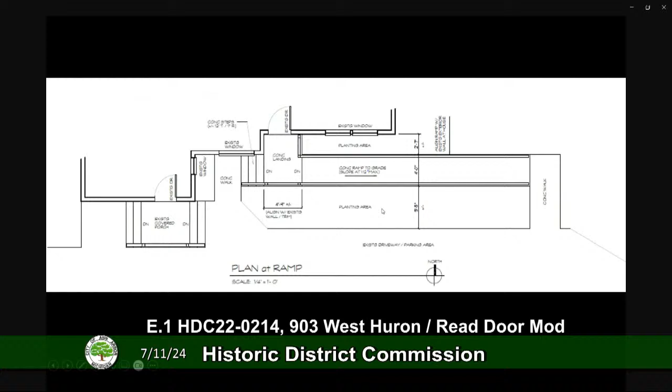In terms of the Secretary of Interior standards: number 1, a property will be used as it was historically, or will be given a new use that requires minimal change to its distinctive materials, features, spaces, and spatial relationships. 2, the historic character of a property will be retained and preserved. The removal of distinctive materials or alterations of features, spaces, and spatial relationships that characterize a property will be avoided.

5, distinctive materials, features, finishes, and construction techniques or examples of craftsmanship that characterize a property will be preserved. 9, new additions, exterior alterations, or related new construction shall not destroy historic materials that characterize the property.

For entrances and porches, it is recommended to design and install additional entrances or porches on secondary elevations when required for a new use, in a manner that preserves the historic character of a building. It is not recommended to introduce a new entrance or porch that is incompatible in size, scale, material, and color, or to install secondary service entrances and porches that are incompatible in size and scale with the historic building.

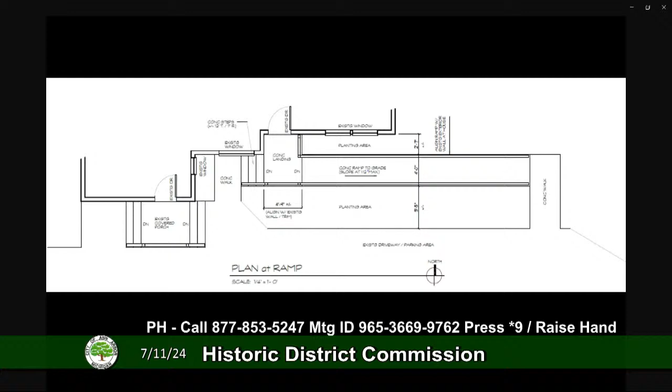So what was PVC then? The actual deck boards that are currently Doug fir — oh, I thought it was a concrete deck. Oh, the deck boards of the ramp. The deck to the left, in the report, there's not the one with the ramp — that one.

There is a concrete block on the parking lot side that there's a wood structure resting on. That gray is a concrete block that's painted, matching the other concrete, but it's the only one painted. It's made up of a wood structure, maybe a 2x8 frame, but on top is a tongue and groove Doug fir that's completely dilapidated. The framing's fine, but the proposal for PVC would replace that tongue and groove Doug fir. And again, we would do Doug fir if the board would prefer.

We're here to respond to you — you propose what you want to do, and we respond to it. I appreciate that very much, but I'm also very open. You guys have some creative minds, and the time to figure all that out is working with the city, which you clearly did, and we appreciate it. But at the meeting here, it's difficult to try to design things, because then we have a moving target we're trying to approve. We're fine making little changes, but we're not the design board to say what material should be used here.

Okay, but I think we've got, as far as I can tell, all the materials that I was questioning. Okay, let's take a break. We'll go to the staff report, and then we'll move on from there. Thank you, Bart.

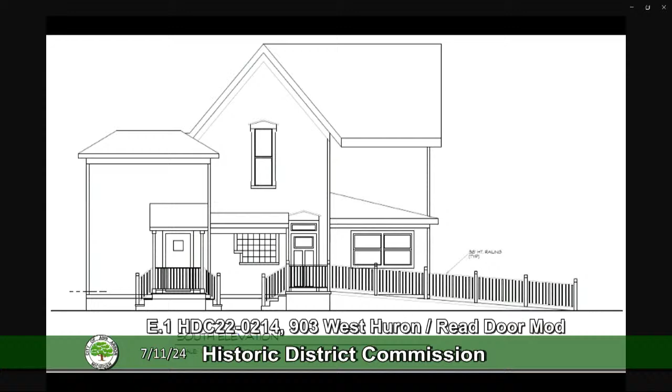The siding, to that point, was just to make everything look uniform. So we have the left addition, I'm going to call it, that is a stairwell - I don't believe that was originally, I think that was a kitchen, but anyways we'll call that stairwell the left door on the back of the building. That has an old brick foundation to it that is exposed, and underneath that very modern stoop is a cement block.

It's not out of trying to cover things up, it was just trying to make the building look more uniform - a bit of a counterintuitive thing. The standards are to show the different periods that the building was added onto, and I think it's fine, I don't mean to throw that into trouble. Because aesthetically, we really want to make this building nice - that's the goal. We have some significant goals, and we've procured a lot of excellent experts to work on this thing.

Dry blasting veneered brick is not something we normally do. We did that in the Riders Hobby Shop building when we brought that together, and we've done it on a few other buildings on Main Street, but that is only just - I'll leave it black if that's what you guys want, I'll do whatever you want. But then there are other things you can spend your money on that'll have more impact.

For the new ramp, I wanted it brick only because then it would blend with all of that veneer nicely, but we can use anything you want, brick works for me. Brick is fine. Yeah, brick is fine.

When you build that ramp, is it wood framed, or are you planning on building it out of block and brick, having it solid and then skinning it with a veneer? It would be solid - a solid cement structure would be my hope for it, it'd just be a better long-term piece. Okay, veneer makes more sense, I see what you're saying now - in my head I saw it as a wood frame, that's gonna be a weird thing, I get it now.

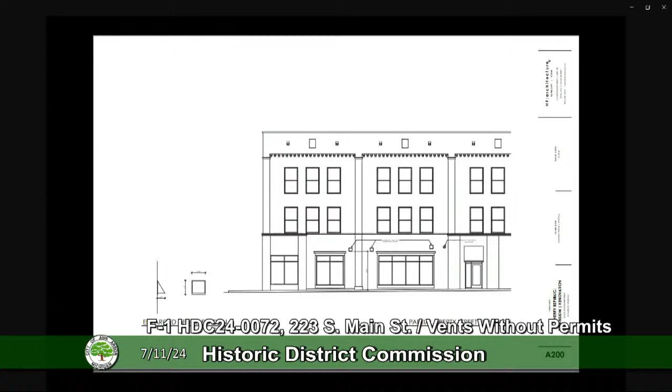Here are the drawings that you can see. They are circular penetrations in the masonry, and the applicant is proposing to cover them with these square vents. Here are some applicant photos, and here is what the vent would look like.

I did read these Secretary of Interior standards, so I'm just going to flip through these ones already. But I will say that the work does not follow the Secretary of the Interior's recommendation of identifying and preserving masonry features that are important in defining the overall historic character of the building, such as walls. It also does not follow the Ann Arbor Historic District guidelines, which state that attaching mechanical equipment so that historic fabric is not damaged or destroyed is appropriate, and installing mechanical equipment and wiring in locations on the roof, rear elevations, or in alleys so they are not visible from the street is also appropriate.

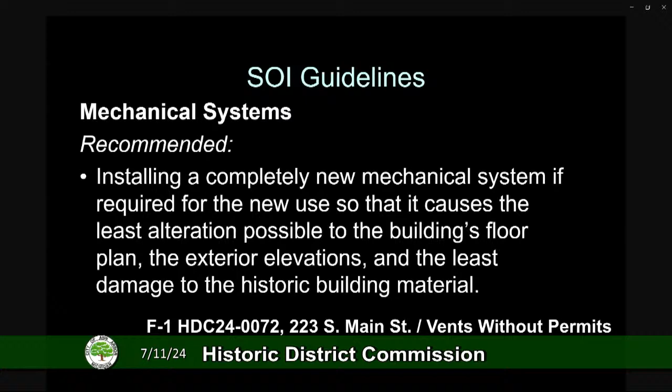There are some more SOI guidelines about changing masonry and mechanical systems and health and safety, similar to ones in the Ann Arbor Historic District Design Guidelines. The Historic District Commission must decide if these 3 new penetrations on the south elevation facing Liberty Street are significant intrusions requiring remediation, or if they are approvable. Thanks.

Thank you for the staff report. Now we'll go on to the review committee report. Please let us know when you're there looking at it. You know, what is it? What does it look like?

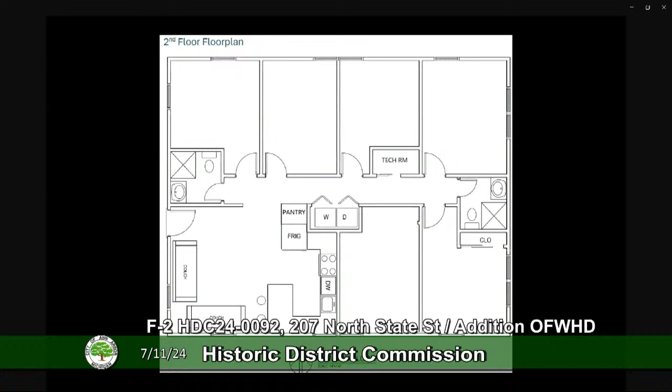We have some floor plans, basement. Again, please note that this new entrance will be extended, and then the door will be below grade. First floor, second floor, third floor.

So there was a lot there. Staff appreciates the remediation effort of the applicant to remove the non-historic egress stairs on the front of the house. Staff feels that the size, location, and design of the proposed dormers follow design guidelines to the extent possible. Staff overall recommends approval of the work except for the two egress windows that are closest to State Street on the north and south elevations because of their visibility from the street.

So again, a lot there. Happy to go back through things, clarify, and then the applicants are here as well. Thanks.

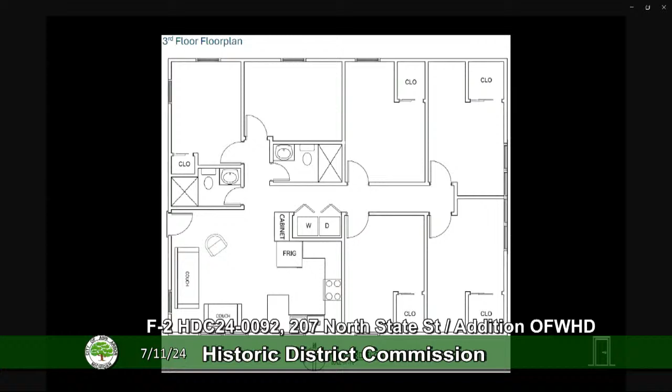Okay, thank you for the staff report, Mariana. I appreciate that, there's really a lot in there. We'll probably have questions for you as we go, but in the meantime, let's move forward with the review committee report. Commissioner Kaplan.

I think the first impression one gets coming up to this house is that it's currently encapsulated by very old fire escapes, most of which I think it's a coin toss in safety whether you stay in the fire and use the stairs, they're rickety. So the owner's effort to bring new logic to emergency egress is going to bring a huge improvement to the house.

It seems like what's being proposed is more systematic and it's going to clean up the face of the house. You can see that in some places the original windows have these really interesting tall, narrow, three-pane vertical windows. You can see it if you zoom in. It's hidden a lot by storms, but in places where they still exist in the house, the owner is trying to keep them, and where they have to be removed for the doors and escapes, putting them where a window historically has just been removed is great. I think that's all I've got.

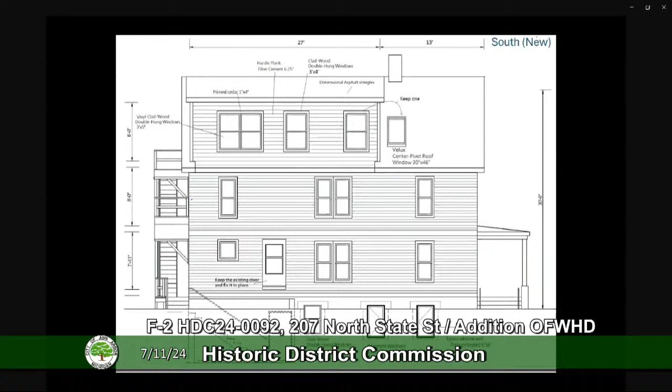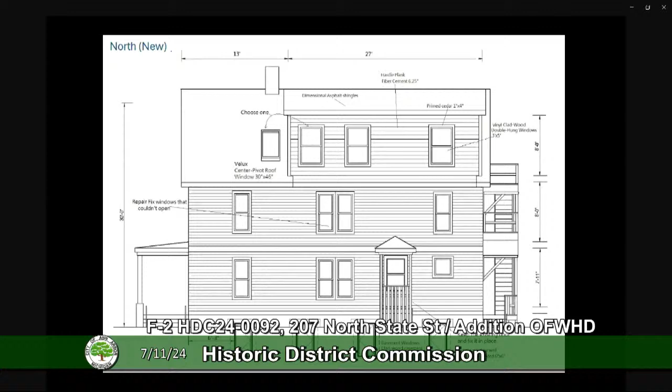Okay, let's look at the north, actually, as well, just real quick here. North, new, okay. So, yeah, I'm not seeing anything here. So let's take a look at the front elevation. That's the east.

Really, the big change here is that hideous fire escape is being removed, which the staff report already mentioned, and we would echo that it's a huge improvement.

I'm just curious, there's a lot of heat pumps being added, but I'm still seeing the through-the-wall AC. Is the through-the-wall AC on the front elevation going to remain in place, or is that being removed?

We can remove that. I'm just curious, because you're adding all these heat pumps - if it was great, we could remove all the through-the-wall AC. I think we can keep it there and just seal from inside. We don't need that open for AC anymore.

So that's going to be removed, okay. All right, and then the windows, that's a new addition to us. We're just seeing that now, but to me that seems much more appropriate than what is there for a front elevation of a historic home.

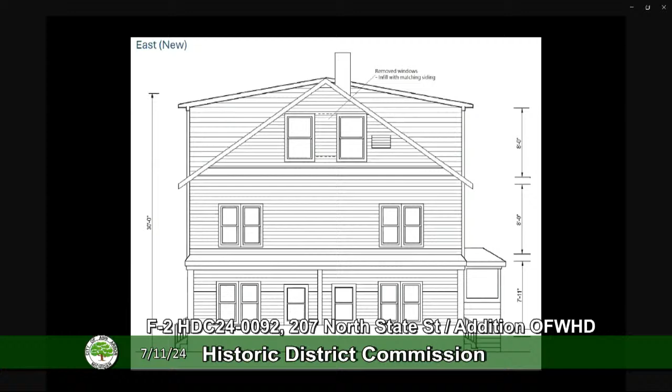I think that the window - do we know what window that is, Mariana? Do we have something in the staff report? No, these are the ones that were just added today, so we don't have all the details. Do we know if they are wood windows? They are all the same as the north and the south. They match all the other windows.

Okay, I think we'll ask that these windows come through for staff approval, since they are on the front elevation. Are you asking that right now, or do we need to do something in the motion? It's in the motion right now, specifically for these windows, that they should have staff approval. Got it, okay.

I'm just looking at the window information. Okay, they're the clad wood windows, I just need to remind myself.

Okay, so then, well that's the whole, we went all the way around. Sorry, there was just so many things going on, it just seemed good to go elevation by elevation. All right, so I really didn't hear any pause.

Okay, so then let's go to a vote on this motion, and then we'll talk egress windows. Okay, so all those in favor of the motion, please say yes. Yes. All those opposed, please say no. Okay, so that motion carries, that part of the application has been approved.

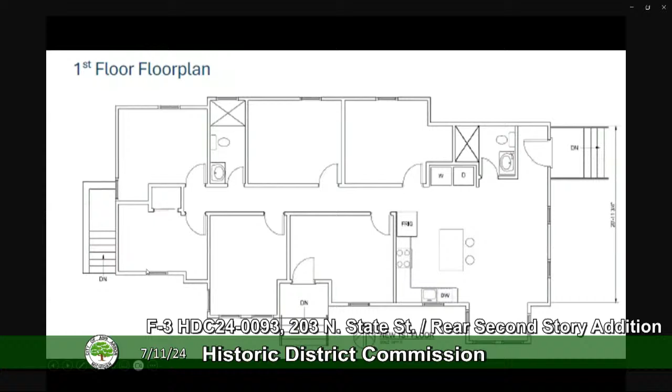Basement floor plan, you can see this new entrance here. First floor, second floor. This is a photo, 1969 photo, so the non-historic siding was added pre-1969, not sure exactly when, and then the vertical boards, as you can see, were added after.

Here are some of the applicant photos. Hardie Plank is proposed to be the siding on the new addition, not on the rest of the house where the non-historic siding will be removed and then repaired and replaced as necessary.

The shutters, then we've been through the standards, and a lot of the guidelines are similar to the last one. So again, lots of things going on. Again, a note that this is a corner lot, but overall staff finds similar findings to the last one, that staff appreciates the remediation efforts, particularly removing the non-historic siding and adding the shutters rather than the vertical boards that are there now.

Overall, staff finds that the application is appropriate except for the egress windows, again, the ones nearest North State Street, and the moving of the basement entrance closer to Ann Street so that it will be more visible.

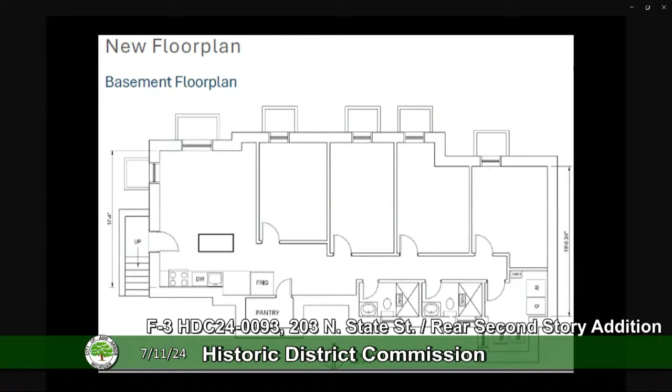I think my vote would be to just move everything up the drawing, such that the front of this stair goes back to here. But why does the front of the stair look like it's sticking out there? Take this and bring it back to here. So I propose this another way, you walk down the stair from the west - do you want to mirror it instead? Yes, that's better, mirror it.

So the applicant is asking us to mirror it, so then will this riser here be over here somewhere, the same distance? So it's going to be over here. Okay, which we have a thing there anyway. Okay, that's what is being proposed.

And it's clearly better than what's there, because what's there has something in front of the front facade. We'll discuss what you've just proposed - that also makes it kind of easy because we can visualize it.

Any other comments on this? Well, for the applicant, on this part right here - can we go to the south elevation? I think this is just a drawing thing, but I want to make sure. This little bit right here is the existing roof overhang, and this facade is in from that. I think this roof is going to extend out a bit - there's an existing overhang right here. You're not just chopping that off, right? You're going to keep that.

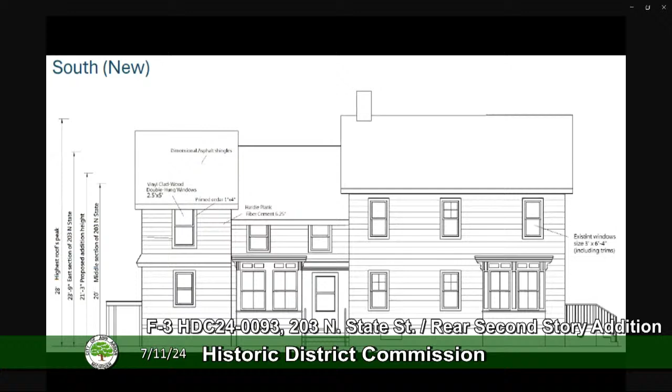And that was my other question, I think. Does anyone have any other questions for the applicant? I don't see any. So take a seat - we might call you back up, but thank you for answering those, Yashan.

Okay, so now we go to the public hearing. Let's open the public hearing for this application. It's 203 North State Street.

I don't see anyone here. Do we have anyone raising their hand, hitting star 9? There are no hands raised at this time. Thank you very much. I think we'll have a party if anybody's ever on there. Well, it's feast or famine, either no one or we have 20 people on the line.

Okay, the public hearing portion of the application is now closed, and I will ask if anyone would like to make a motion. I can go for it, thank you.

I move that the commission issue a certificate of appropriateness for the application of 203 North State Street, a contributing property in the Old Fourth Ward Historic District, to add a 180 square foot second floor rear addition, remove the non-historic siding and repair the historic siding, remove faux shutters at the front elevation and replace them with wood shutters, rebuild the egress stairs on the north elevation, install mini splits at the rear of the house, and install 3 new egress windows in the basement on the north elevation, with the exception of the one closest to North State Street on the drawings.

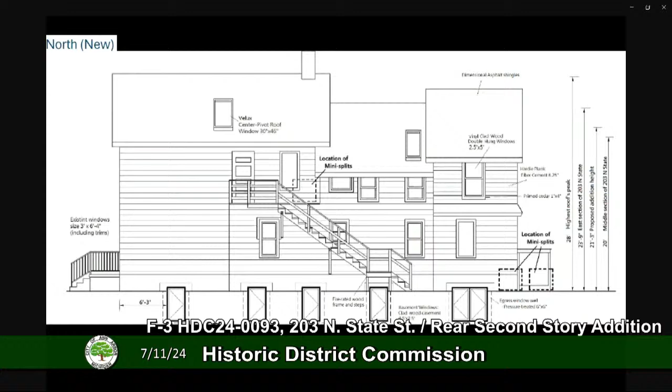Okay, a new skylight. Then I guess we just have the rear elevation left. All right, so in this, we're ignoring the basement. Right, so I think we've discussed everything that we need to discuss.

All right, so let's go to a vote here on this motion. All those in favor of the motion, please say yes. Yes. All those opposed, please say no. Okay, so that motion carries. That part of the application's been approved.

Can we have the next motion, please? Sure. And you've heard what the applicant has already proposed, so as you're going, you could just read it and we'll critique it, or you can make the change in real time. For the new basement door, stair, half wall, and handrail, and the basement egress window on the west elevation.

So I move that the commission issues a certificate of appropriateness for the application of 203 North State Street, a contributing property in the Old Fourth Ward Historic District, to remove the basement covering, relocate the basement entrance on the west elevation including the door and stair, install new egress windows in the west elevation, and install an egress window in the north elevation, 6 feet 3 inches from the front elevation.

As proposed, the work is compatible in exterior design, arrangement, texture, material, and relationship to the rest of the building and the surrounding area, and meets the Secretary of Interior standards for rehabilitation and guidelines for rehabilitation of historic buildings, in particular standards 2, 9, and 10, and the guidelines for windows and entrances and porches, as well as the Ann Arbor Historic District guidelines for all windows and residential porches.

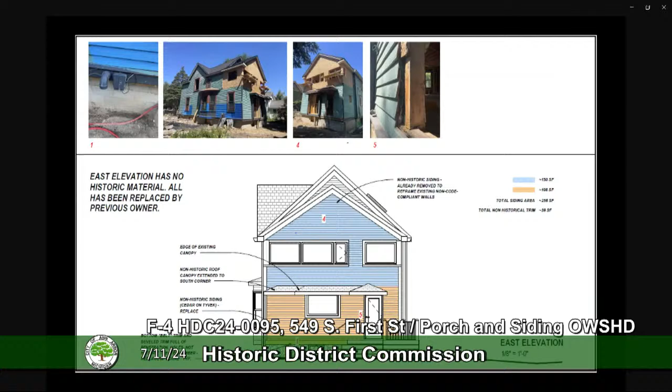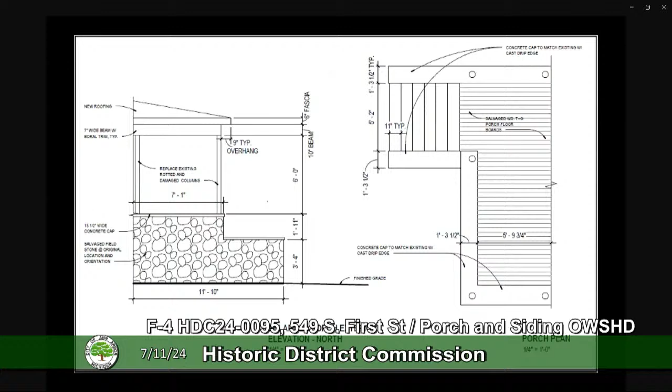We've already walked through these standards, and a couple for entrances and porches we've already talked about. I'll just read through the wood section: it is recommended to identify, retain, and preserve wood features that are important in defining the overall historic character of the building, such as siding. It is not recommended to remove or radically change wood features which are important in defining the overall historic character of the building.

It is recommended to repair wood features by patching, piecing in, consolidating, or otherwise reinforcing the wood. What I didn't mention before is that when the existing historic wood siding is in good condition, it'll be removed, replaced, and put back on, starting with the front elevation, then moving to the side elevations, then the rear elevation, so that the most visible parts of the house receive the historic siding.

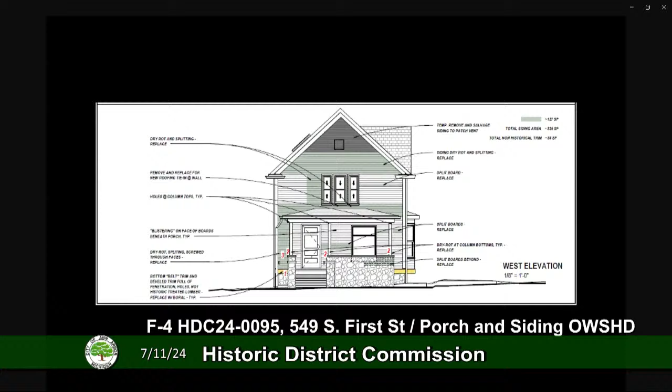So all I can say is we would do our absolute best to remove it without destroying it—salvaging it, carefully storing it, putting on the vapor barrier, and putting it back up. For the amount of siding that would need to be replaced with new, we would match the existing siding with new wood siding that gets painted. So we're not asking to change the material in any way, just asking to match it.

So that's the siding piece. I'm happy to speak about the porch as well. I'm not sure if you'd like to discuss them separately, or if I should just go through the whole application.

Okay, so the porch—as was mentioned, we're really asking to replace the columns, which are rotten. I really do think that would have to be a replacement. I did notice this morning that the tops of these columns are actually foam, so I'm not sure these are the original. You can see in this picture, top right, there's a hole that was bored through the top of that column. The main body of the column is indeed wood, but the tops are foam, so I'm not sure these are the original columns to begin with.

But as our application states, our intent would be to match them. We might want to look into that a little bit more in terms of what the original columns were versus what these are. But in any case, our intent would be to match them.